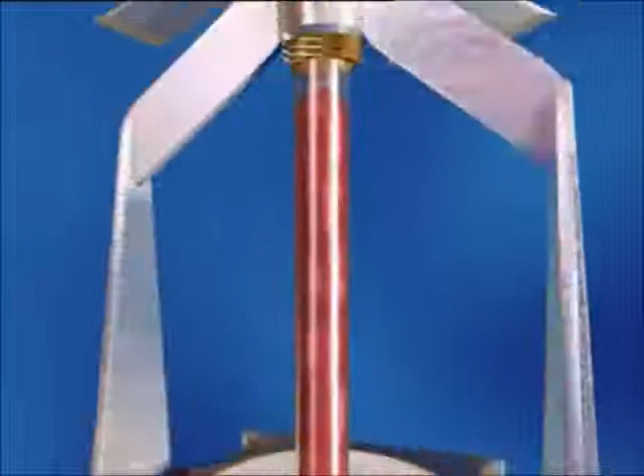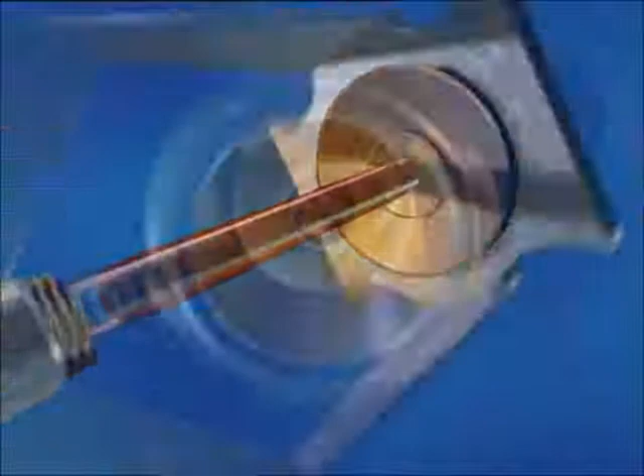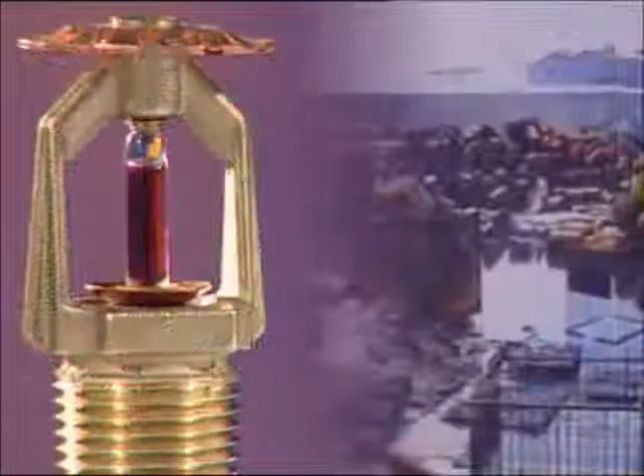Fire sprinkler systems were invented over 120 years ago. Since then, several hundred million sprinkler heads have been installed throughout the world. In that time, they've effectively protected thousands of buildings, helped to prevent the financial collapse of numerous businesses, saved countless lives, prevented innumerable burn injuries, and protected the environment from catastrophic fire-related pollution. They're universally acknowledged as the most effective first line of attack against fire.

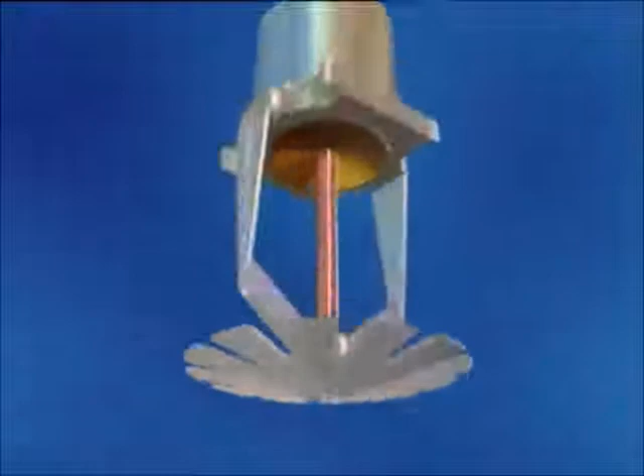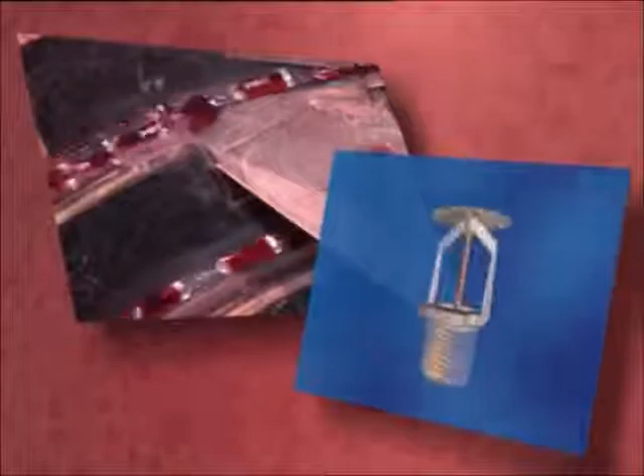The world's first rules for the design and installation of automatic fire sprinklers were written in the UK by John Wormald in 1885. Fire sprinkler systems in the UK are generally designed in accordance with British Standard 5306 Part 2 and, in some instances, Loss Prevention Council (LPC) rules for automatic sprinklers. American rules may sometimes be used, being Factory Mutual or National Fire Protection Association. Sprinklers are designed to cope with the fire risk presented by each individual building and may also be specifically configured to save lives.

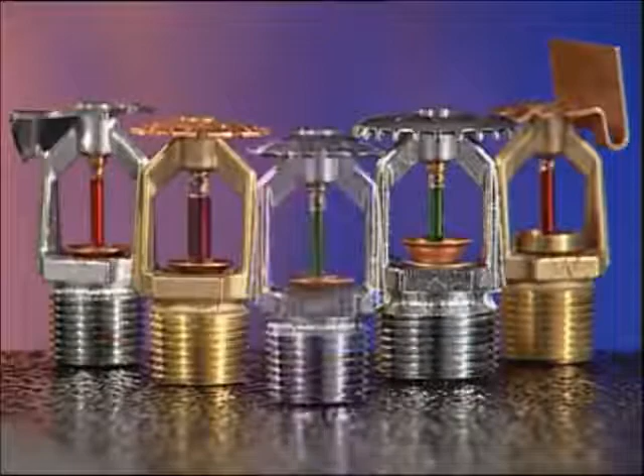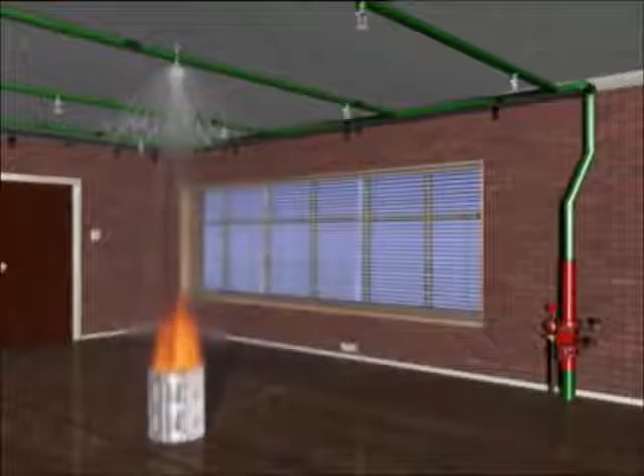Water still remains the most effective firefighting medium available. Sprinklers will deliver water right into the heart of a fire during its early stages through a specially designed sprinkler head. Sprinkler heads are unique. They automatically detect a fire, discharge water right into the seat of the blaze, and operate a local alarm. They can also operate a remote alarm to alert the fire brigade or other emergency centre.

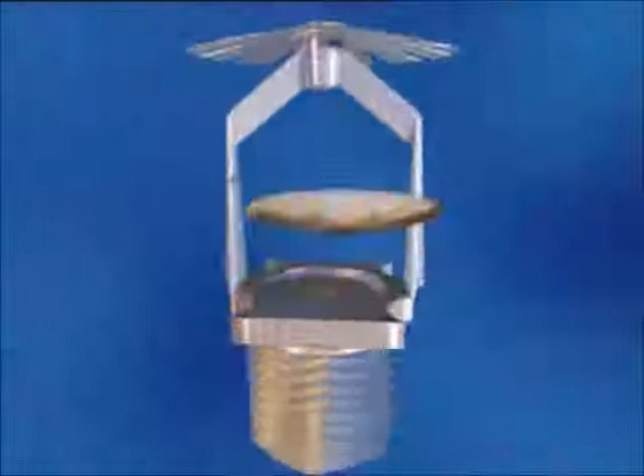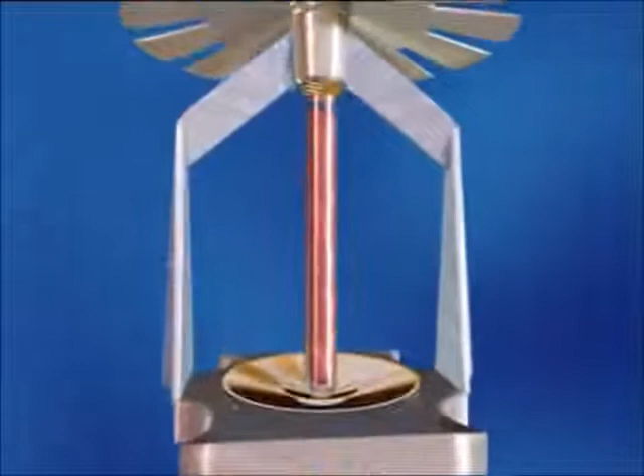A typical sprinkler head comprises a threaded body to connect to pipework, with a valve seal to hold back the water. The valve seal is retained by a glass bulb which contains a liquid that has a high coefficient of expansion. A small measured quantity of vapor remains trapped when the bulb is hermetically sealed. When the liquid expands under the influence of heat from a fire, pressure in the bulb rises until the vapor is compressed. Further increases in temperature cause a rapid build-up of pressure sufficient to shatter the bulb, releasing the valve seal and allowing the water to flow onto a water distribution deflector. This results in an even distribution of water droplets in a predetermined pattern over the fire.

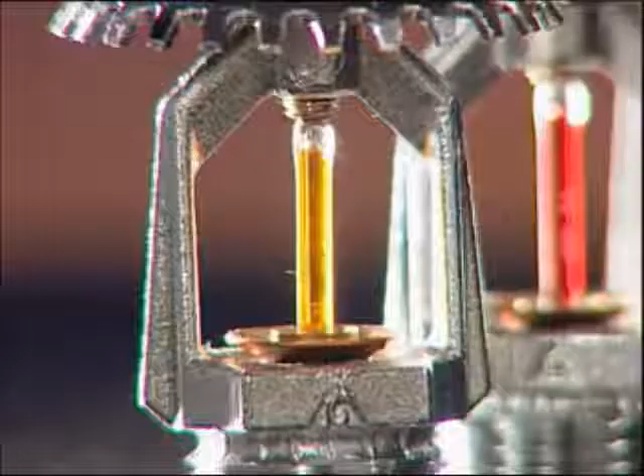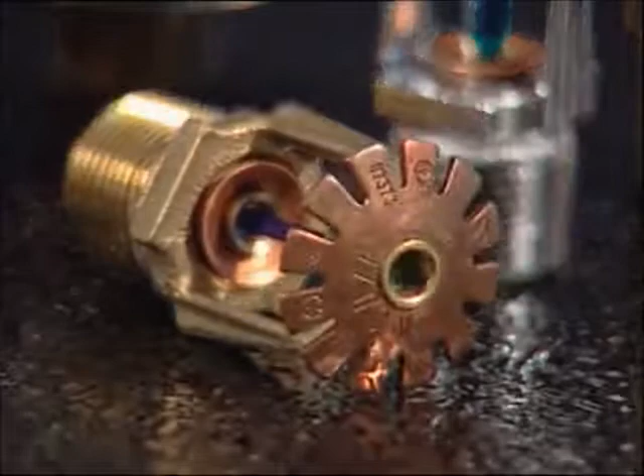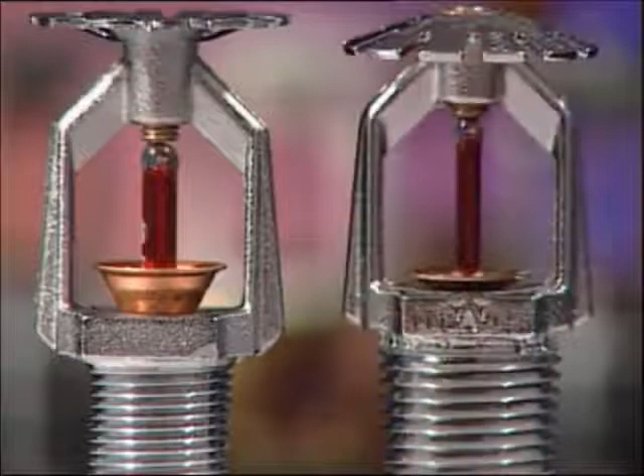Sprinkler heads are available in a variety of operating temperatures, which are identified by the color of the bulb. The specifier has a vast array of sprinkler heads available to him. Each type of head is designed to cope with different fire risks, different operating temperatures, and different operational requirements. The British Standard defines fire risks as light hazard, ordinary hazard, or extra high hazard. Generally, as the hazard increases, so does the water discharge or density discharge.

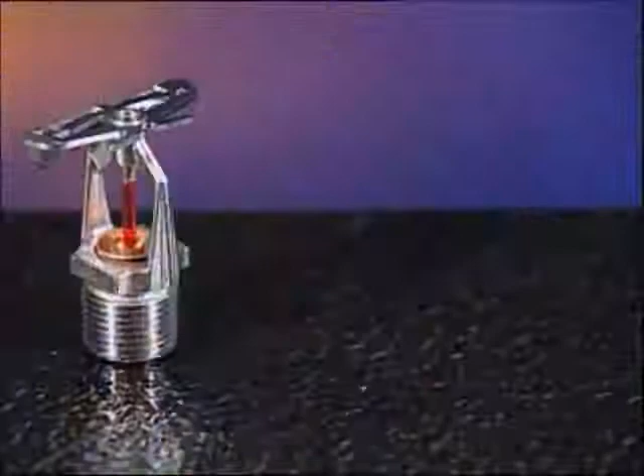Conventional sprinklers can be mounted in either the upright or pendant position, with a deflector designed to spray a proportion of the water discharged onto the surface of the ceiling. Spray sprinklers in upright or pendant positions are used for applications where all the water needs to be discharged downwards. Sidewall sprinklers are primarily used to keep ceilings clear of pipework for aesthetic reasons or to avoid having to disturb existing ceilings when installing. Each sprinkler protects up to 17 square meters in light hazard fire risks and 9 square meters in ordinary hazard fire risks.

Sidewall sprinklers with extended coverage are specifically designed to give an extended coverage of water distribution, with one sprinkler able to protect an area of up to 21 square meters. This type of sprinkler must have a quick response bulb. In a fire, few deaths result from direct contact with flames. The greatest threat comes from inhalation of the products of combustion, such as carbon monoxide, hydrogen cyanide, hydrogen chloride, other toxic gases, and the associated heat.

The reaction time of quick response sprinklers minimizes the life-threatening levels of toxic gases and temperatures. In many environments, there are people who cannot escape without assistance, such as in hospitals or homes for the elderly. Quick response sprinklers provide valuable time for those in charge to assist their escape.

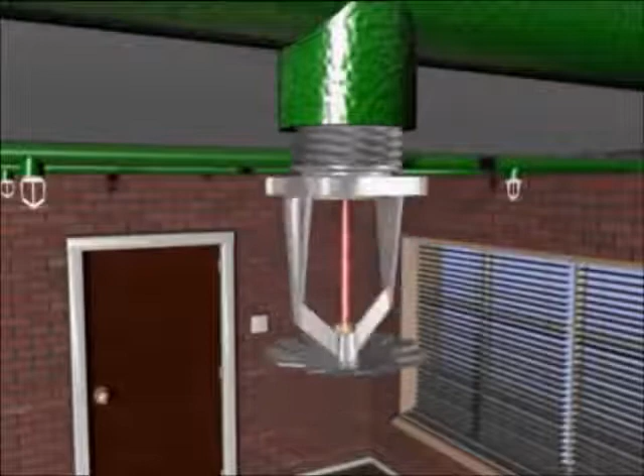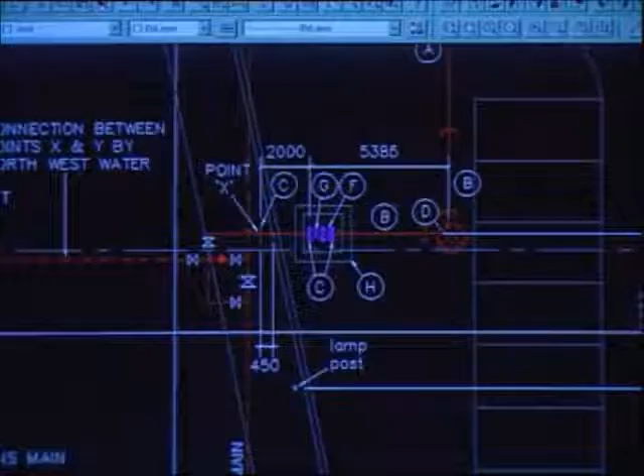A sprinkler head is connected to a water supply via a network of pipes fed throughout the building. The area protected by each sprinkler head can vary from 9 square meters to 21 square meters depending on the fire risk. The pipework is hydraulically designed to ensure the correct flow and pressure of water is maintained at each sprinkler head. The water supply to the system can be fed from the town main for light to medium fire risks, such as residential, offices, hotels, and light manufacturing and commercial occupancies. For high fire risk areas, such as heavy manufacturing and warehouse storage, a pumped supply from a water storage tank or reservoir is normally necessary.

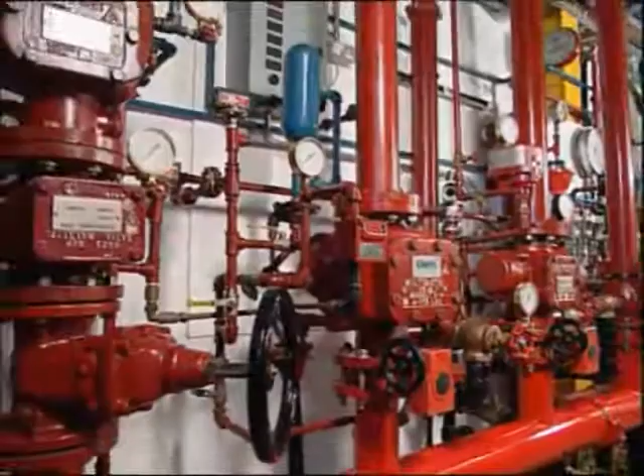The design requirements are specified in the British Standard BS 5306 Part 2 and LPC, FM or NFPA design rules. A control and alarm valve automatically delivers the flow of water to the sprinkler heads. There are generally 5 types of sprinkler system that all require different valve arrangements.

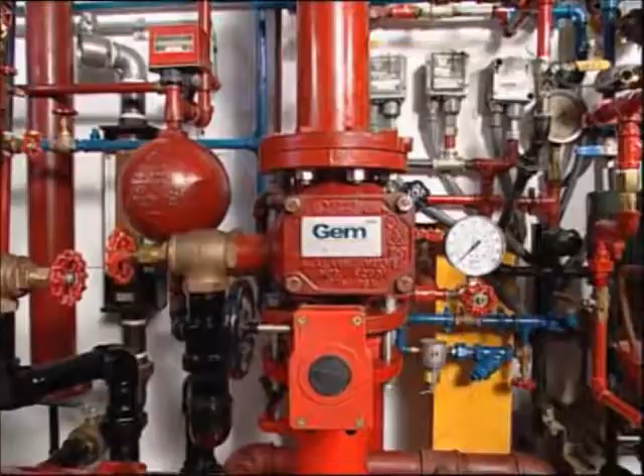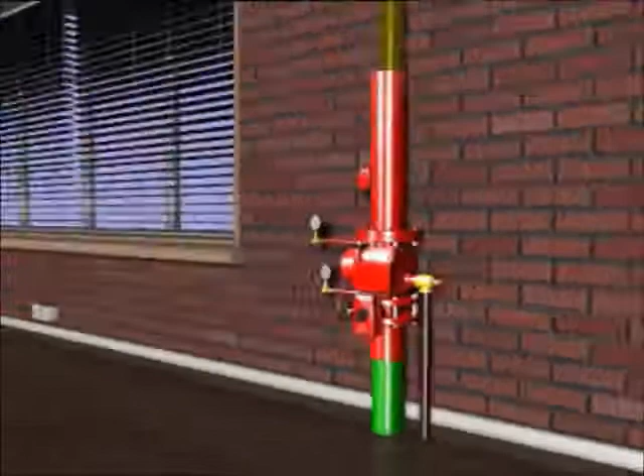A wet system is where the pipework is permanently charged with water and used to protect premises where temperatures are unlikely to fall below freezing point. Where the ambient temperature may fall or be below freezing point, the presence of static water in the sprinkler pipes is clearly undesirable. In this situation, a dry system can be installed in which the pipework is charged with compressed air. When a sprinkler operates, the compressed air is released and the control valve opens, allowing water to flow into the pipework and to discharge from the operated sprinkler heads.

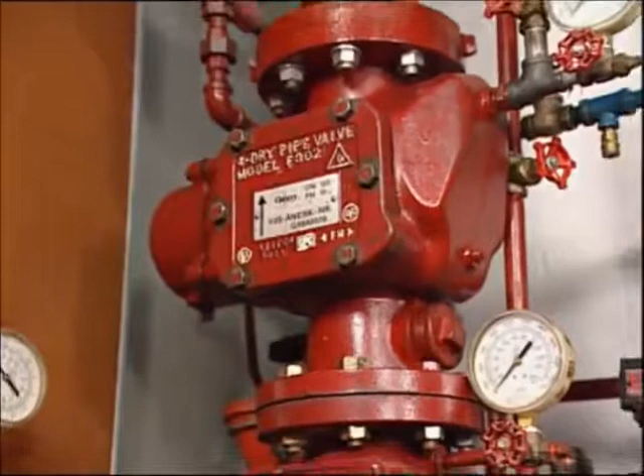An alternate wet and dry system, as the name implies, allows the system pipework to be alternately charged with water in summer and with air in winter, when there is a risk that the ambient room temperature can fall below freezing.

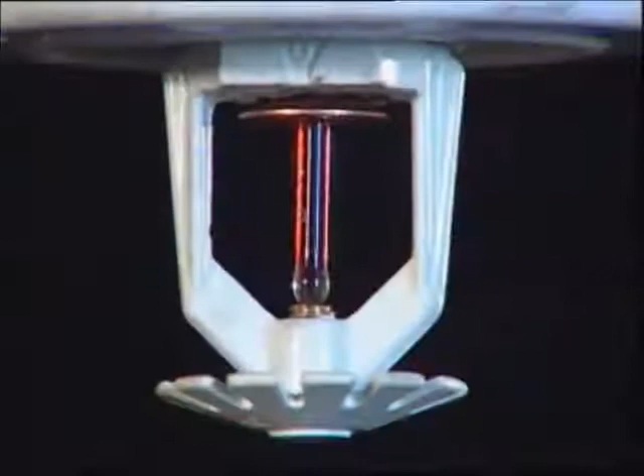Pre-action systems are comprised of a standard sprinkler system and an independent electrical system of heat or smoke detectors installed in the same areas as the sprinklers. On receipt of a signal from 2 or more detectors, the main control panel automatically opens the control valve, allowing water to flow into the sprinkler pipework. Water is only discharged when the individual sprinkler heads reach their operating temperature. Any physical damage to a sprinkler in a non-fire situation will not result in water discharge, but will cause both visual and audible alarms to be raised at the main control panel only.

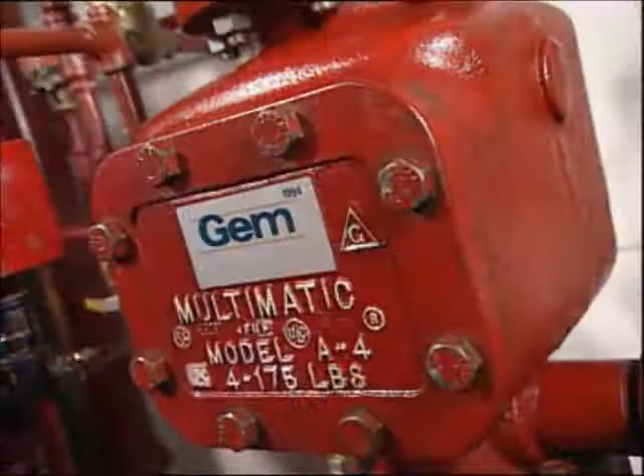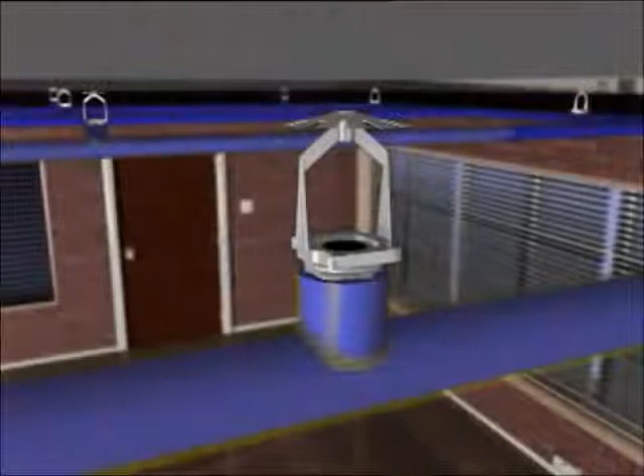A deluge system, unlike any other typical sprinkler system, is designed specifically for high-hazard applications with fast fire growth potential. The deluge valve is actuated by a separate detection system responding to a fire. This brings a large number of open sprinklers into action simultaneously throughout the protected area.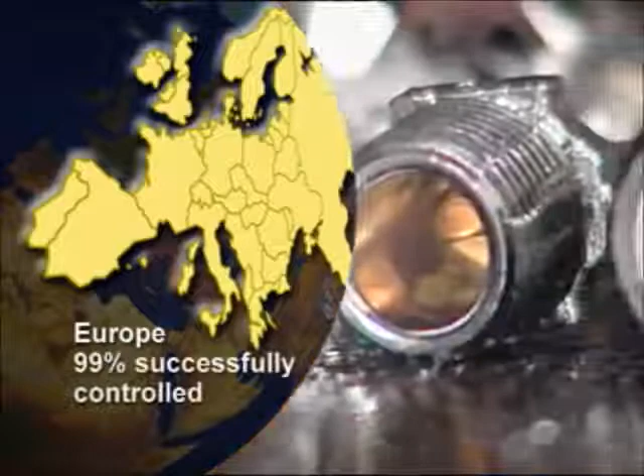The successful performance of sprinkler systems has been detailed in records from across the world, paying testament to their outstanding reliability and effectiveness. In Australia and New Zealand, where it's a requirement that all fires must be reported, records reveal that over a 100-year period, sprinklers successfully controlled 99.5% of fires in sprinklered premises. Statistics collated in Europe over the last decade are remarkably similar, showing that in fully sprinklered premises, 99% of all fires have been controlled by the sprinkler system.

The reason sprinklers are so effective is because they attack the seat of the fire before it has time to grow and spread. There's no excessive use of water. In Germany, for example, 86% of fires in sprinklered locations have been controlled by 5 or fewer heads. In the UK, it's reported that of the fires in sprinkler-protected buildings over a 10-year period, almost half were controlled by 1 or 2 sprinkler heads only.

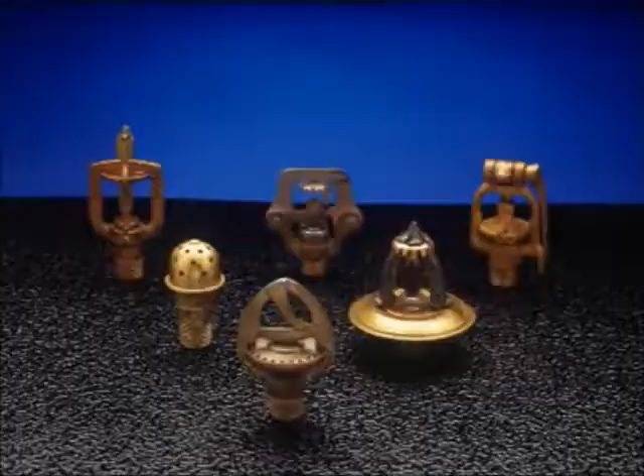Fire brigades, local government authorities and politicians alike have all seized upon these statistics. This has generated numerous campaigns for sprinklers to be installed in applications that could only ever have been dreamt about when sprinklers were first commercially launched over 120 years ago. That's because sprinklers are unique. They not only detect a fire and raise an alarm, they operate to control it and in many cases extinguish the fire before the arrival of the fire brigade. Only the sprinkler heads closest to the fire operate.

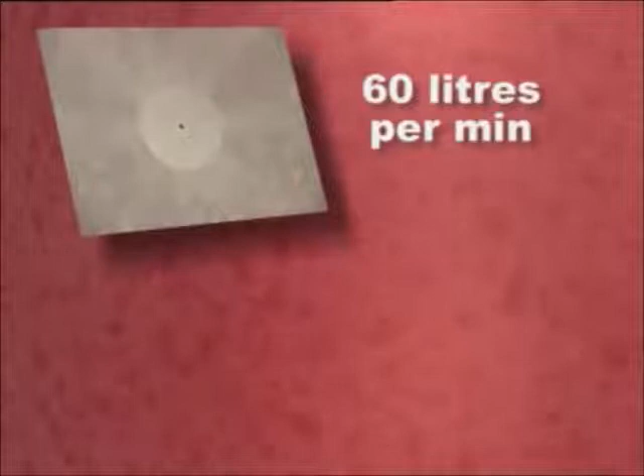Water is discharged by a sprinkler directly onto a fire at a rate of a minimum of 60 litres per minute, in comparison with an unsprinklered building where the fire brigade using only 1 fire hose could discharge 500 litres per minute. The fire will also be much larger as it will have grown for at least 10 minutes before the fire brigade arrive, so the likelihood is that more than one hose would be used.

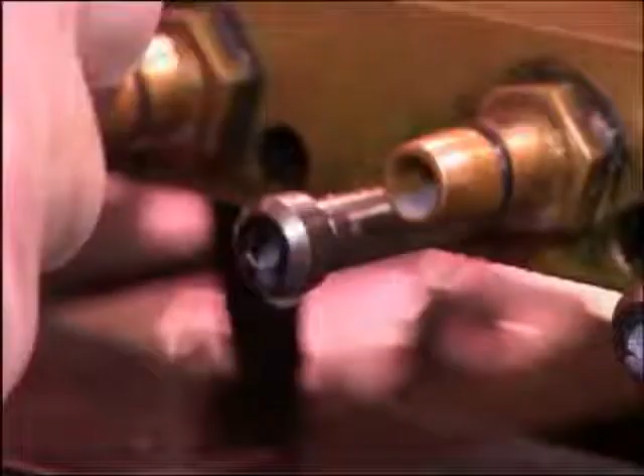Worldwide research shows that of the 40 million sprinklers installed every year, only 2 may operate accidentally. This is because every head is individually tested before leaving the manufacturer. Sprinklers are economical to install. For example, in the case of office blocks and hotels, the sprinkler system would cost about the same to install as a quality carpet for the equivalent area. Sprinkler systems will have a lifespan of at least 25 years, probably 50 years. Some systems are still in use today that are over 120 years old.

The threat from fire will never change. It will always be with us, endangering life, property, and the environment we live in. Fire sprinklers will protect us and future generations. Fire sprinklers. Protection for life.